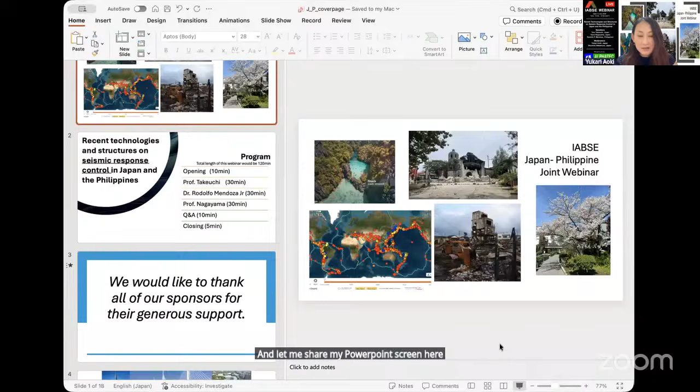Let me share my PowerPoint screen here. So this is the joint webinar, and today's program is about 120 minutes. Now we are in the opening session, and we have three speakers, Professor Takeuchi, Dr. Rodolfo, and Professor Nagayama. And we may have a question and answer closing time.

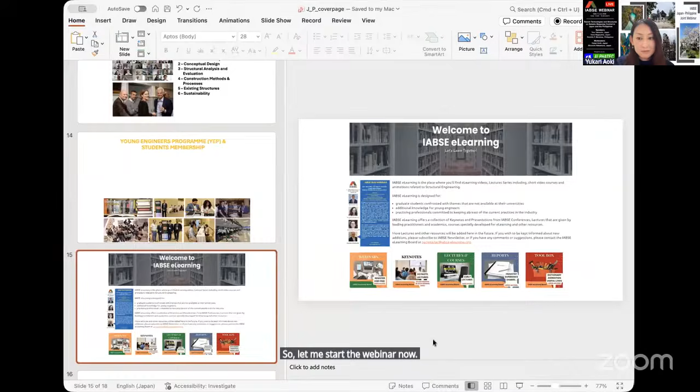So during the webinar, you have the Q&A corner. You can see some extra button at the bottom. You can click more or something, and you can see questions and answers here. And you can type any questions while the speakers are speaking. And we're going to have 10 or 15 minutes of question and answer time, and then speakers will try to answer all your questions. But if we don't have enough time, we will send you answers in the following days. All right. If you don't have any questions, we will start the webinar.

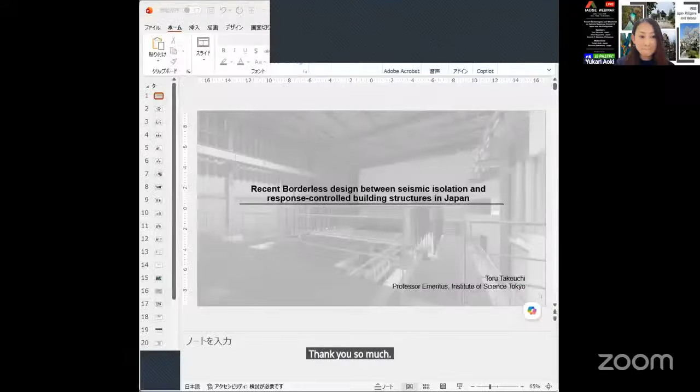Can you see my screen now?

Thank you very much for the introduction. I'm Toru Takeuchi from Japan. I'm a Professor Emeritus from Institute of Science Tokyo, previously at Tokyo Institute of Technology. I'd like to talk about the recent borderless design between seismic isolation and response-controlled building structures in Japan.

As you know, Japan is a very high disaster country. We have big earthquakes, typhoons, floods, and also volcanoes. Behind me is a picture of the Noto Peninsula earthquake in 2024. And we also have many earthquakes all over the world. Recently we had a big earthquake in South America, I think.

Because of this kind of disaster, seismic isolation and response controlled structures with energy dissipating devices or dampers have been widely applied to large numbers of buildings all over Japan in these 30 years. And they have been recognized as one of the ordinary structure options.

Professor Takeuchi, can you check the size of the slide? Too big? You can't see the full size? We can't see the whole slide. Okay. That's fine. Okay, thanks.

There are many systems now developed, and the boundary between these systems, between seismic isolation and response controlled buildings, is becoming ambiguous. Seismic isolation and response controlled structures share a common concept of

Okay, so probably this one should be erased, I think. Oops. How to? Okay.

Seismic isolation and response controlled structures share a common concept of, firstly, designing the main structure to support the self-weight elastically and be soft, which means increasing the natural period. And the second is reducing response by energy dissipation devices like dampers or fuses to absorb the seismic energy. So the systems recently realized in Japan are categorized in these figures.

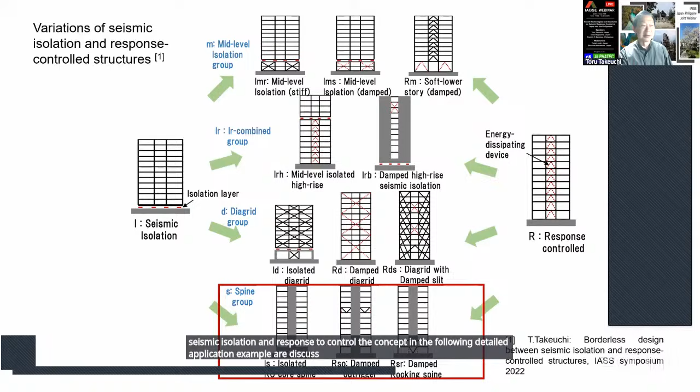Firstly, this is an example of a mid-level seismic isolation system. These are increasingly being applied, especially in the central Tokyo area, to avoid the loss of site use near the property boundary at the ground level and the risk of flooding. There are two types: those in which the lower floors are designed to be rigid, like the left side, Teco building, and those designed as soft with viscous dampers, as in Roppongi Tri-7 on the right.

In principle, a vibration control system with a soft first story is similar to seismic isolation, where the deformation is concentrated in the lower layers. This Nippon TV Bancho Studio introduces a soft lower story with viscous dampers on top of the diagonals, and obtains the seismic isolation effect without using seismic isolation bearings. Although such a system needs integrity at the deformation concentrated layers, seismic isolation pits are no longer necessary.

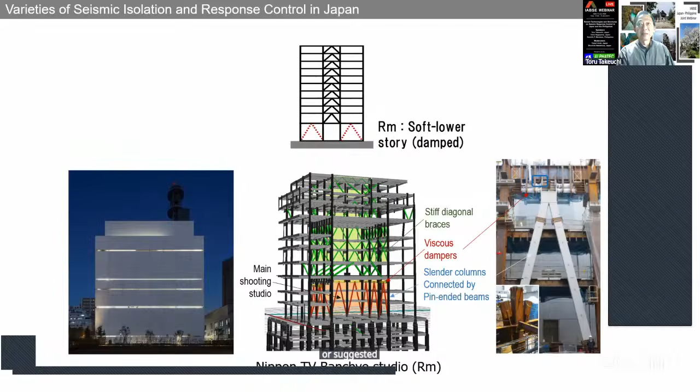However, in such seismic isolation using long columns, consideration must be given to avoid excessive damage concentration by the P-delta effect. So limiting it to only a very small first story height is not recommended. Distributing it over at least two or three stories is more suggested. And this figure shows an example of a structure that combines seismic isolation and response control together.

This is Roppongi Grand Tower on the left. Damping devices are also distributed in the lower structure. The isolated layer is here, and the upper part of the building is isolated, but the lower part has energy dissipation devices distributed. So it combines a response control structure and a seismic isolated structure.

On the right side is the Yoyogi Seminar Tower. It is combined with coupled wall structures, and the whole structure is supported by seismic isolation bearings with an actively controlled oil damper. It also produces shear deformation between the two coupled shear walls, and distributes viscoelastic damping devices to reduce the seismic and wind vibration effects.

And this is a combination of an outer braced frame structure around the perimeter, called a diagrid or grid skin, combined with a seismic isolation system. The outer grid skin structure has diagonals, which increase the horizontal stiffness of the superstructure. So that is a good match for the seismic isolation system.

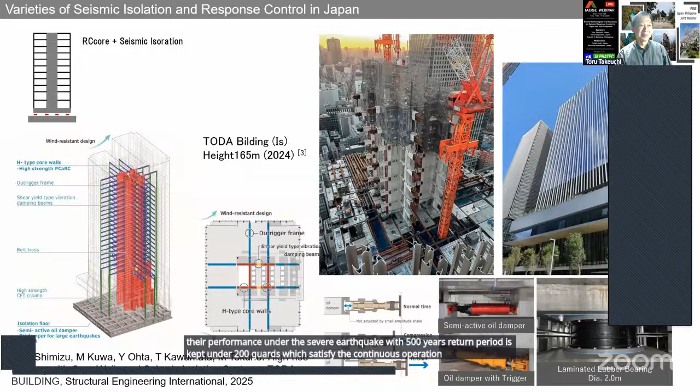acceleration. Because of the high stiffness of the core walls, the performance under a severe earthquake, with a 500 year return period, is kept under 200 gals, which satisfies continuous operation even under a severe earthquake.

Another structural system, the core spine frame with rocking and energy dissipation members, is also called a controlled rocking frame, damped spine system, or sometimes a strongback system, and has been applied to the seismic retrofit of old steel buildings in the US. In Japan, in the retrofit of a G3 building, the old frame is attached to a new spine wall with a pin support and damping devices on the shear plate, used to control the collapse mechanism and avoid damage concentration at the

typical floors. And this concept is also used for the new Materials Research Building at Science Tokyo's Yokohama campus. I introduced a rocking elastic steel spine truss frame, which rocks and dissipates energy at the vertical dampers, buckling restrained braces, and that can control the shear drift evenly and avoid damage concentration. So that is applied to new buildings.

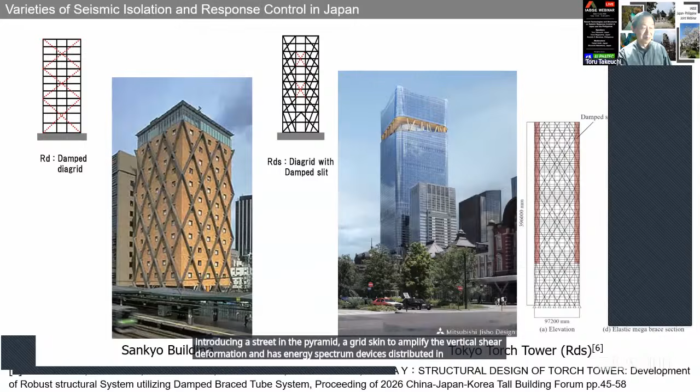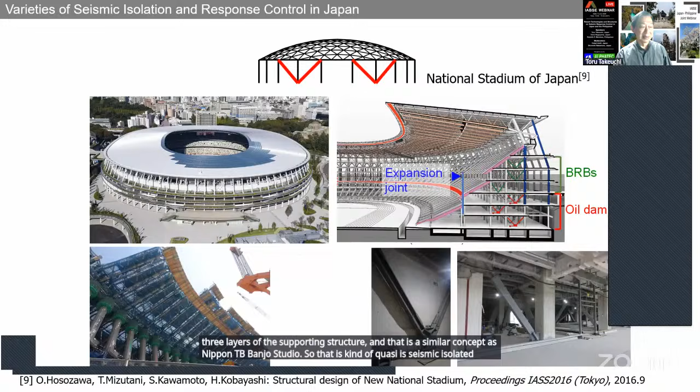Back to here is a detailed introduction to the Tokyo Torch Tower mentioned earlier. This building is currently under construction, but once completed, it will stand 385 meters tall, making it the tallest building in Japan, with an extremely large floor plan. This one line is 100 meters by 100 meters. It was determined that a damped outrigger was tried, but it was not functionally effective. Therefore, the plan is to adopt a braced tube structure to keep the natural period under 7 seconds, while also incorporating vertical slits into the tube to amplify the shear deformation, and inserting dampers into these slits to ensure high damping.

Okay, so this is a plan and the elevation of the buildings. The left figure shows the structure plan view, and it has a big plan of 100 meters by 100 meters. At the corner and the center of each part, in the 8 places of the plan, they have a slit. And in the slit, 4 layers or 3 layers of oil dampers were distributed.

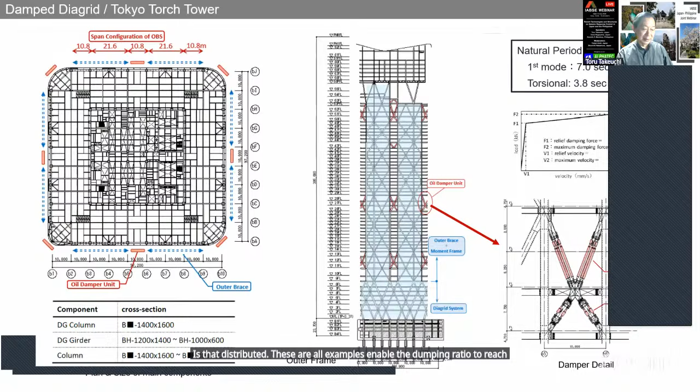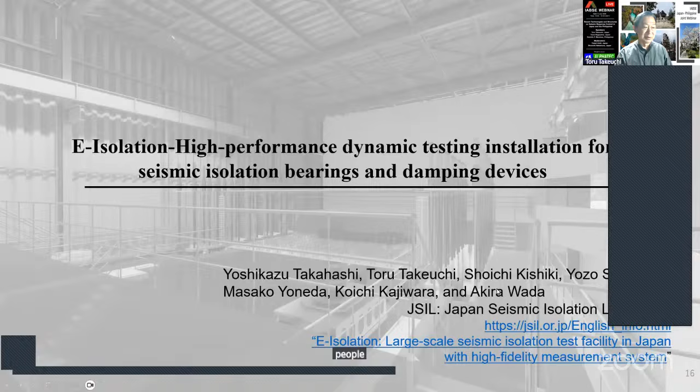Okay, so in the later part of my talk, I talk about the recently completed seismic isolation bearing testing facility called e-isolation. Many people worked together on this, not only these ones, so many people. So please check these web pages. As explained, the trend toward large-scale seismic isolation and vibration control structures is gaining popularity in the world. To address this trend, large-scale dynamic seismic isolation testing facilities were completed in the US, Taiwan, Italy, and China. And 2 years ago, we completed e-isolation in Japan.

So in these facilities, the test specimen is compressed by applying a high vertical load from the bottom, and received by the reaction beams through the moving platen. So here the specimen is compressed under a very high axial load, and this horizontal dynamic jack is moving the platen in the horizontal direction. And the reaction force of the specimen is measured by this load cell.

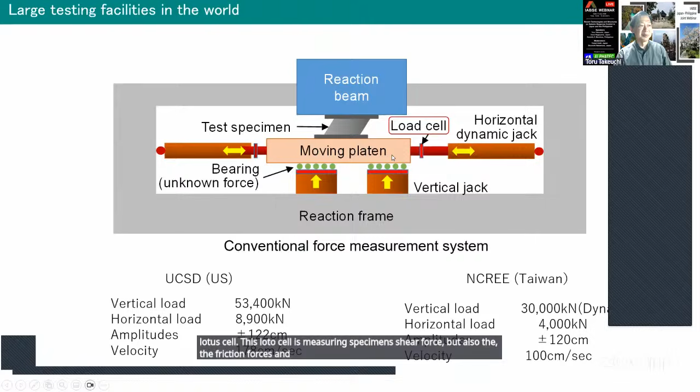But the problem is that even with a bearing with a very smooth surface, under the very high compressive load, some friction is still introduced. And also the moving platen is shaking dynamically, so its inertia force is also introduced into the load cell. This load cell is measuring the specimen's shear force, but the friction force and the inertial force can be contaminated into this load cell. So this is a common problem: this friction force and the inertial force in some testing reach 20% or so. So this is very difficult to remove in the models.

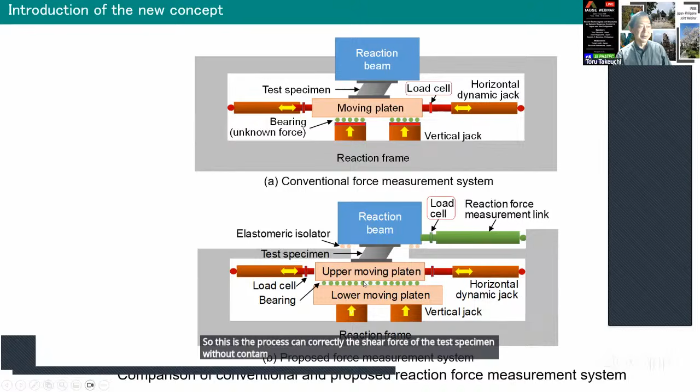So in the new seismic isolation test facility in Japan, we changed the concept. The reaction beam is not fixed, but supported by horizontally soft bearings, that is rubber bearings, and then connected rigidly to the reaction force measurement link, and the load cell was placed here. That means when the platen moves, the friction force is not transmitted to here, and also the inertial force is not affected here because the reaction beam doesn't move very much. So this load cell can correctly measure the shear force of the test specimen without contamination from friction forces or inertial forces.

So in this concept, the new e-isolation facility was completed in 2023 in Miki City in Hyogo Prefecture. That is Japan's largest experimental facility for seismic isolation and vibration control systems, capable of withstanding vertical loads of 30,000 kilonewtons, horizontal loads of 5,100 kilonewtons, and amplitude of 1.3 meters at 800 millimeters per second velocity.

The facility is placed near E-Defense. It's north of Kobe city, in Miki city. The reason for placing it here is that in the future we can use the hydraulic pump of the huge E-Defense facility, and it can also be expected to be used for reinforcing this e-isolation system. Okay.

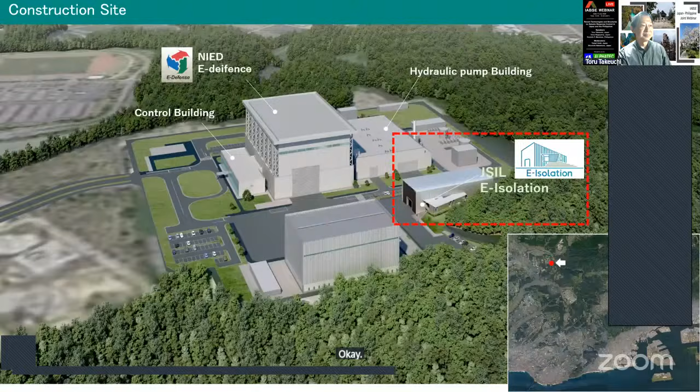deformation of the bearing forces, bearings. So we can completely have a clear, direct reaction force without contamination of friction or inertial forces. So that means by obtaining accurate reaction forces in real time, it is possible to perform a real-time hybrid simulation of any buildings using actual test specimens.

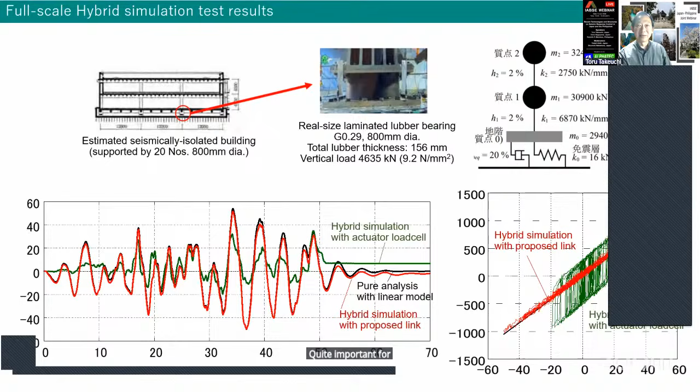The red one is the hybrid simulation with the proposed measurement link. They have very clear linear lines, and the response very precisely reproduces the pure analysis with a linear model. So this measurement system is quite important for real-time hybrid simulation.

So here is a scene of how it moves. The lower moving portion is vertically moved, supported by 24 vertical actuators, and the upper moving portion moves horizontally with 4 actuators, and the measurement link is supporting the reaction beams. Here is a specimen.

That is a 1.2 meter diameter natural rubber bearing compressed by 17,000 kilonewtons. Frequency is 0.1 hertz, and the amplitude is 500 millimeters. The same specimen can be looked at from the side. It's like this.

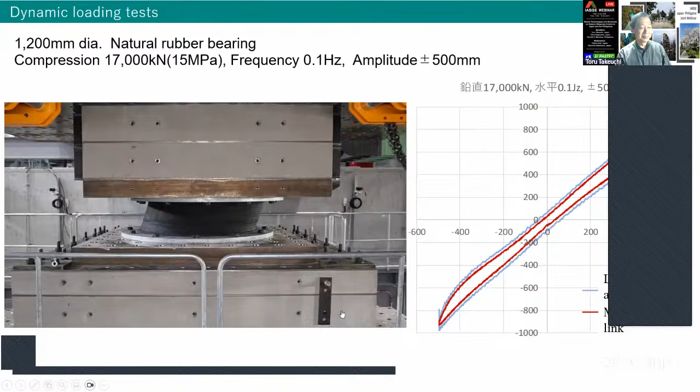Friction pendulum. The friction pendulum moves up with the horizontal movement. So in the testing, the lower portion should go down along with the horizontal displacement. But keeping the axial force and moving it down is a very advanced technique for the control.

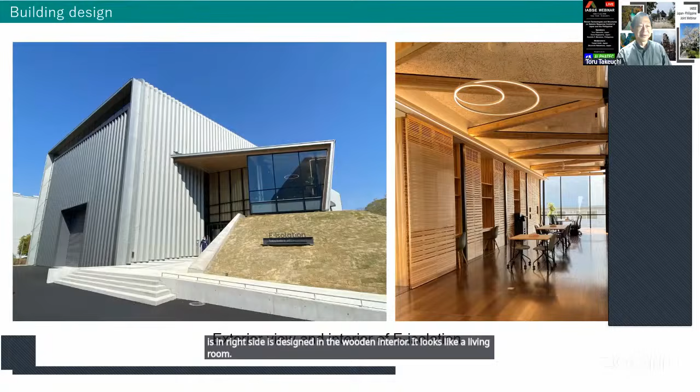So this facility looks very nicely designed and compact, and the operation room on the right side is designed with a wooden interior. It looks like a living room. So when you visit these facilities, you can stay very comfortably for the testing.

So if you have the time and the budget for testing in these facilities, please inform us for your seismic isolated or response controlled structures project. Please check on the specimens that can be tested in E-Isolation and join us in Miki City. Okay, that's my talk. Thank you very much for the kind attention.

For my presentation outline today, I would like to start with the history of bridge practice in the Philippines, followed by our evolution from force-based design approaches to the current performance-based approaches, and our goal to achieve resilience-based design through the use of seismic isolation systems.

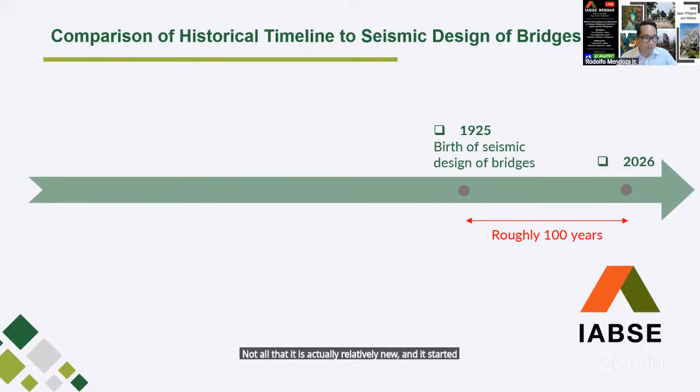The seismic design practice for bridges is not old, it is actually relatively new, and started around 1925 after the Kanto earthquake. So that is just roughly 100 years from where we are right now. That is a similar age to one of our prominent late senators in the Philippines, who achieved 100 years old before his unfortunate demise in 2025.

So we can say that the seismic design practice for bridges is roughly the same age as the birth of IABSE in 1929. And all of this is because of the event in Japan during the great 1923 Kanto earthquake. Many other great achievements in both sciences and engineering were already achieved centuries before the introduction of seismic design in both buildings and bridges.

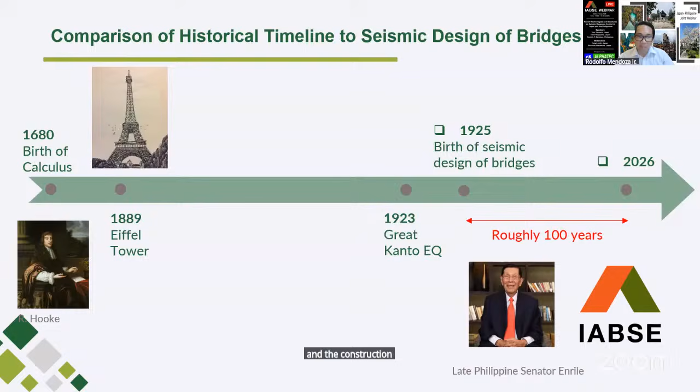The birth of calculus and the introduction of elasticity happened in the 17th century, and the construction of the Eiffel Tower happened around 1889. In the Philippines, one of the notable structures, the San Sebastian Basilica, was completed in 1891, almost the same time as the Eiffel Tower, years before the introduction of seismic design. There is a common myth that the San Sebastian Basilica was also designed by Gustave Eiffel because they were constructed at the same time.

But as an engineer who was involved in the restoration of the church, there is no actual evidence that it was actually Eiffel who designed the system. However, due to the commonality in terms of the steel technology, connection design, and the material used, which both came from Belgium, it is understandable to say that this San Sebastian Basilica was designed by Gustav Eiffel.

It was not until the 1908 Messina earthquake that the concept of considering ground motion in the design of buildings was considered, but not until 1915 that we had a formal definition on how to consider ground motions in the design of buildings, after Professor Sano of the University of Tokyo introduced the concept of seismic coefficient. And not until the 1923 Great Kanto earthquake was the concept introduced in building codes in 1924 and in bridges in 1925.

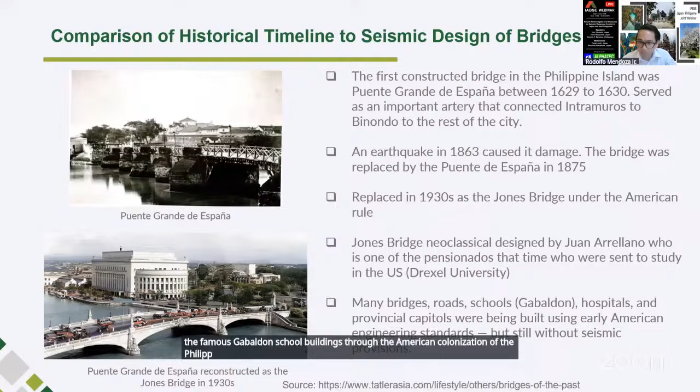But even up to this time, there was no account for seismic design or earthquake provision in the design of these buildings. 1961 was the year the Association of Structural Engineers of the Philippines was established, and from there on, the consideration for seismic forces has been included. In 1982, DPWH required the design of bridges to consider at least 10% of gravity. This was followed by the release of the ASEP NSCP, or the National Structural Code of the Philippines, Volume 2, which is dedicated to bridges, in 1987.

After the 1990 Luzon earthquake, DPWH released a department order which requires all bridges to conform to the latest AASHTO provisions, and later on these provisions were adopted by ASEP under its Volume 2 in 1997. From there on, the DPWH, together with the support of JICA, produced new standards, and the latest is the 2015 release of the DPWH DGCS, which updates all the guidelines for bridges, including standards for seismic provisions following the LRFD bridge seismic provisions, and also the introduction of seismic isolation guidelines.

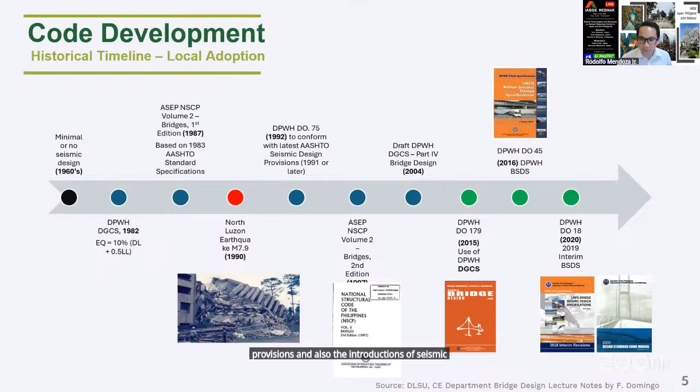If you look at it, the development of code in the Philippines transitioned from the original force-based design concept into capacity and displacement-based design approaches. And now we are looking at how we can further improve our bridge design practice from this capacity-based design and performance-based design to full resilience-based design approaches.

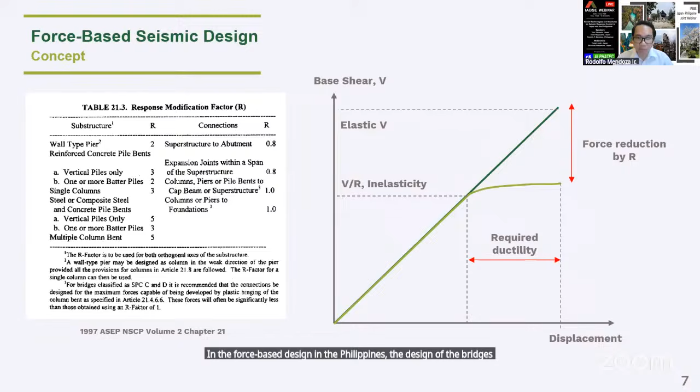In the force-based design in the Philippines, the design of the bridges identified the substructure as the main earthquake-resisting system, and a single ductility factor is used to represent the ductility of the entire system. This is the same concept that has been applied in the US for buildings and was also adopted for bridges in the Philippines. Clearly, there are some limitations with this approach, and this resulted in some of the damages during the 1990 Luzon earthquake, which include damage to foundations, soil liquefaction, the unseating of superstructure, pier collapse, and deformation due to lack of ductility and insufficient seat width.

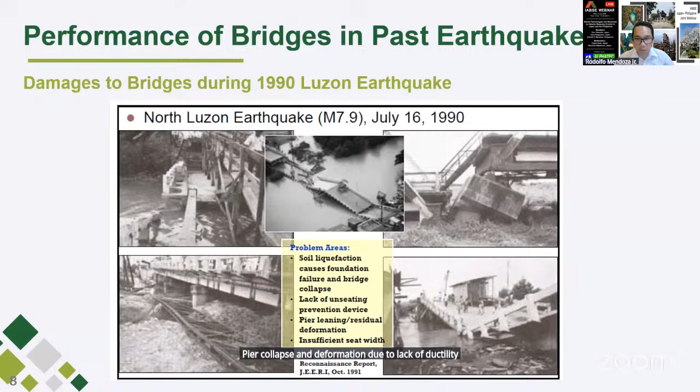However, through the introduction of the new standards, following the learnings from the earthquakes, we have now adopted a combination of code following both the US standards and the Japanese standards. The new DPWH standard for bridges has adopted both the AASHTO provisions and the provisions of the Japan Road Association in the design of bridges. Specifically, this provision still adopts the definition of the R value as a one-system ductility factor for representing the substructure selected for a system, but this time we are introducing two levels of assessment for our hazard levels. We have also adopted seismic performance requirements, which are mostly patterned after the Japan Road Association guidelines. And we have also introduced seismic verification, although mostly on force-based design approaches.

The guideline has also introduced and defined specific earthquake-resisting systems. And now, for the first time in the code development for bridges in the Philippines, we have introduced the use of seismic isolation as one of the earthquake-resisting systems to control the response of bridges in both the longitudinal and transverse directions.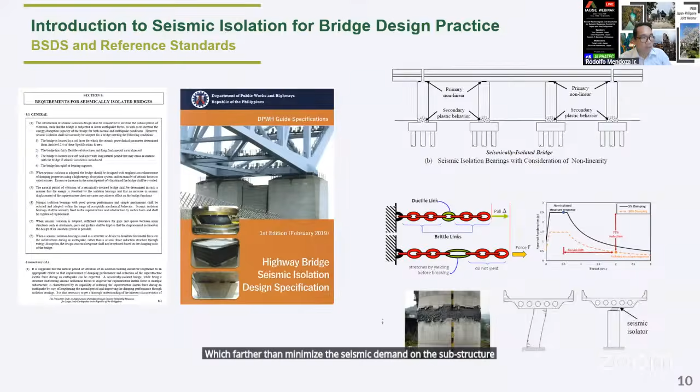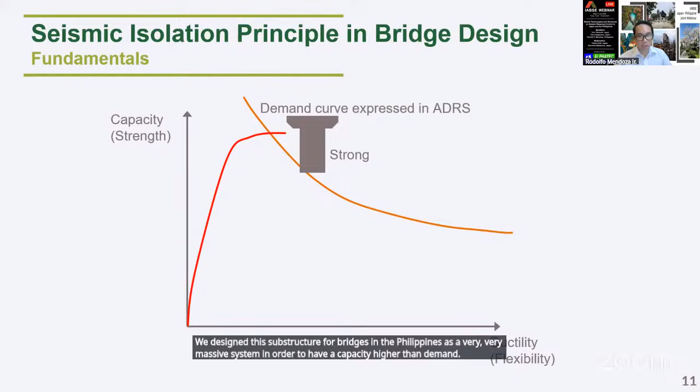So if we look at the original approaches in the Philippines and compare them with the current approach, using the ADRS, or acceleration displacement curve, given a demand, conventionally we designed the substructure for bridges in the Philippines as a very, very massive system in order to have a capacity higher than demand. Through the introduction of capacity-based approaches, we introduced the concept of ductility and capacity-based design, where we can now design flexible and highly ductile structures.

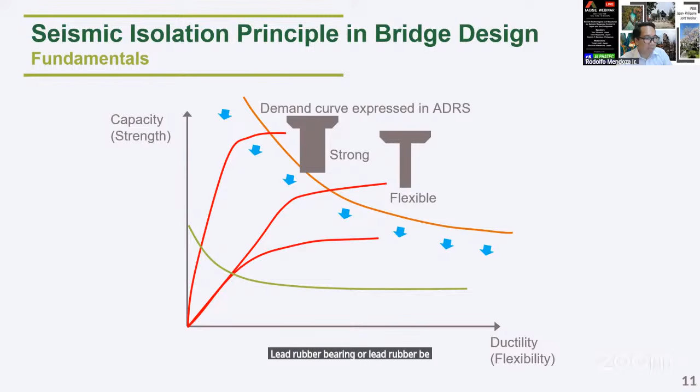But with the introduction of the seismic isolation system, we can reduce the demand on bridges by incorporating lead rubber bearings as well as dampers in the structure, which reduces the demand by increasing the damping and increasing the period of the structure, which then ensures that there will be no damage on the substructures even after a major earthquake.

Of course, there are some limitations in the use of seismic isolation in the Philippines, which are listed in the DPWH BSDS guideline. For example, we are not allowed to use it on soft subsoil conditions unless proven otherwise, if the bridge has a very long period, or if there is tension in the support reactions. Currently, our DPWH guidelines only support lead rubber bearing with plug and high damping laminated bearing. The use of friction pendulum system is not covered by our guidelines.

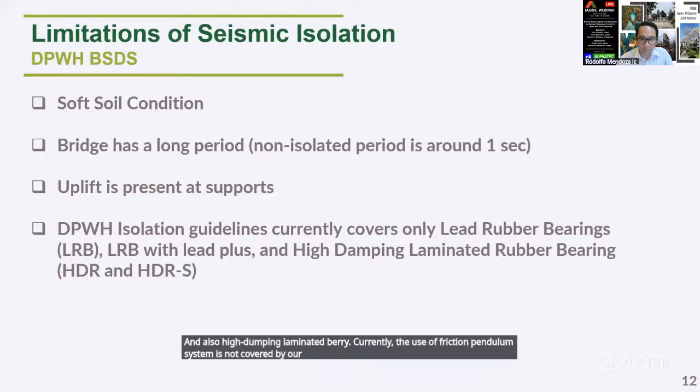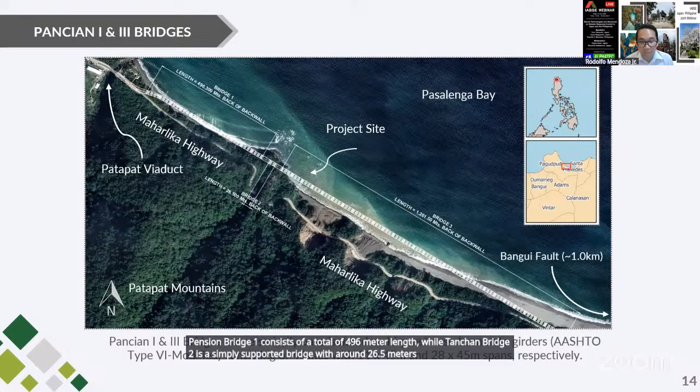To show you some applications of the isolation system in the Philippines, one of the projects we were involved with is the construction of the proposed Pancian Viaduct. This Pancian Viaduct consists of 3 bridges we call Pancian Bridge 1, Pancian Bridge 2, and Pancian Bridge 3. The Pancian Viaduct is a project that connects the existing Patapat Viaduct along the Manila North Road in Ilocos Norte. Pancian Bridge 1 has a total length of 496 meters, while Pancian Bridge 2 is a simply supported bridge around 26.5 meters in length, and Pancian Bridge 3 has a total length of around 1.2 kilometers.

For these bridges, a site-specific seismic hazard assessment was conducted for the entire project to produce 2 levels of design earthquake. The PGA and spectral parameters, as shown in this slide, are provided for level 1 earthquake and level 2 earthquake. Level 1 is a 100-year earthquake, and level 2 is a 1,000-year earthquake. Now, due to the proximity of this bridge to an existing fault, we were able to produce two types of level 2 earthquake: one that is normal to the fault, and one that is parallel to the fault.

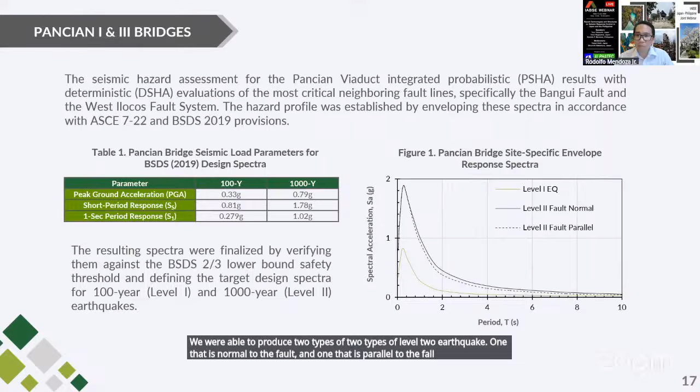Using the generated spectra, we have extracted ground motion data from PEER NGA-West2, and utilizing this, we match those spectra from the site-specific record in order to generate ground motion records for nonlinear response history analysis.

Now, in the Philippines, under BSDS, you can carry out at least 3 ground motion records and take the maximum response from these 3 records as the basis of performance, or get the average of 7 ground motion records in each direction and use the mean value to actually evaluate the performance of the structure.

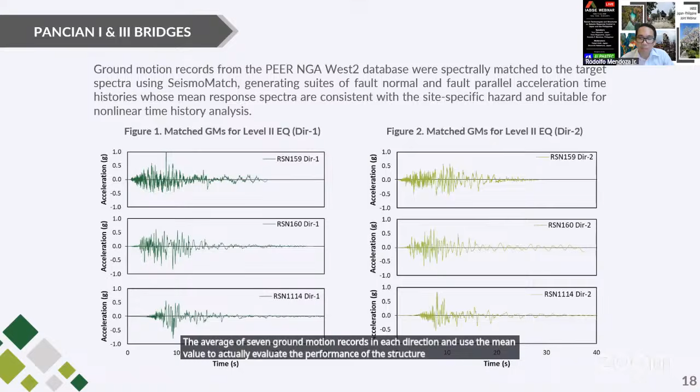In the design of seismic isolation, we normally follow this approach when we design the isolator system. And in most cases, we already work with the supplier of the seismic isolation before we even start the project. So basically, from the bridge design and bridge information, we develop the geometry, initial sizing of the elements, as well as the initial configuration of the bridge superstructure, as well as substructure and foundation.

From this, we develop the mathematical model to represent a 3D configuration of the structure, and we extract the vertical reactions from the support conditions. Using these vertical reactions, we provide this information to the supplier of isolators, which then size and provide the parameters, including mechanical properties of isolators, which we will then use as input to our mathematical model. So this is an iterative approach, and we commonly exchange data until we achieve the target performance for the bridge.

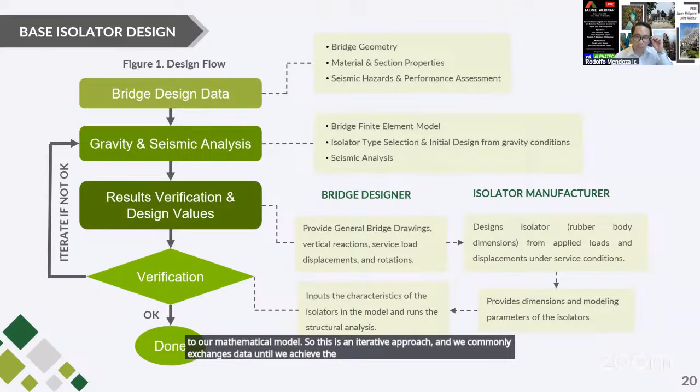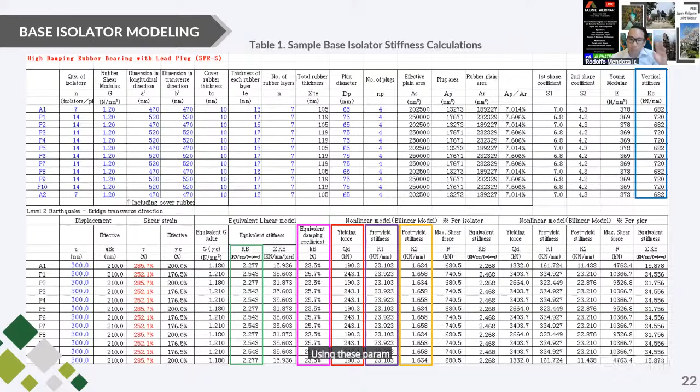Now, these parameters were used to model the bilinear response of the isolators, and the models represent some of the key mechanical properties of the isolation system, including the stiffness, the strength, and the energy dissipation. This process of modeling was iterative, and we refine until the target bridge performance is actually achieved. Using these parameters from the supplier, we then input them to our chosen software and mathematical model in order to confirm if the performance of the system matched the target performance.

For this viaduct, the bridges were classified as critical bridges, which require them to remain elastic under level 1 earthquake and with limited damage under level 2 earthquake. The seismic performance is the same as that of the Japanese standard, which measures performance in terms of 3 criteria: the seismic safety design, the seismic serviceability design, as well as the seismic repairability design.

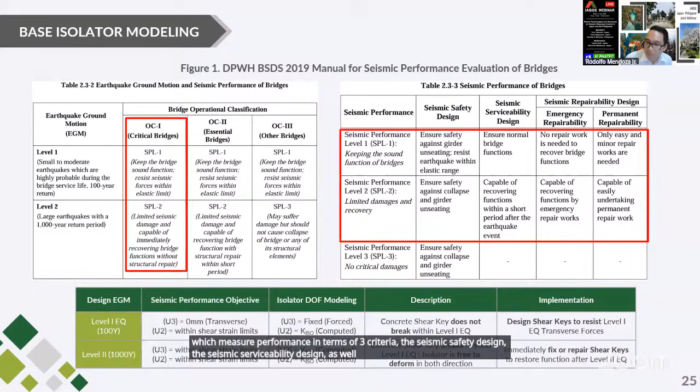This slide shows you the articulation on the behavior of isolators under level 1 and level 2 earthquake. The concept is at level 1 earthquake, the isolator is expected to remain elastic, and it will move in the longitudinal direction, but it is fixed in the transverse direction. The fixity of the system in the transverse direction is provided by what we call shear keys to prevent the system from moving in the said direction.

At level 2 earthquake, however, the isolators are now allowed to move in both directions, longitudinal and transverse. Showing you here the articulation under level 1 and level 2 earthquake, including the specific seismic performance objective and how we have implemented this system, including the modeling of shear keys. Of course, wind demand was ensured to be less than the yield capacity of the isolation system.

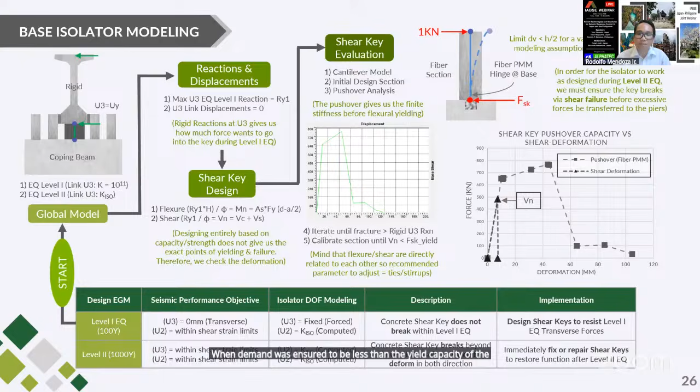This slide here shows the performance of the 2 model bridges. We modeled both a non-isolated Panshan bridge model and a similar bridge but with an isolated system. The slide shows the results of the modal analysis comparing the non-isolated versus the isolated case. It is evident from this comparison that there is a period shift, which is approximately 2 times the period of the non-isolated bridge system.

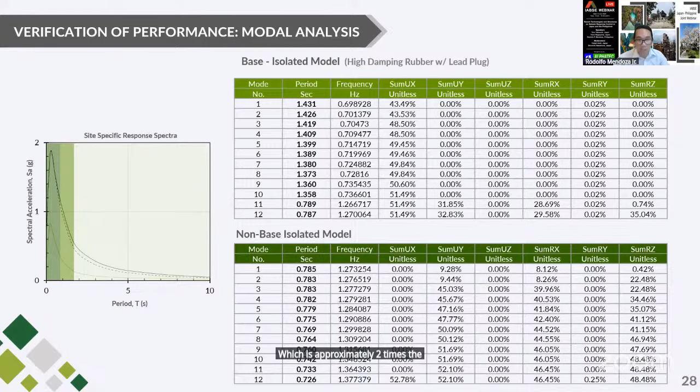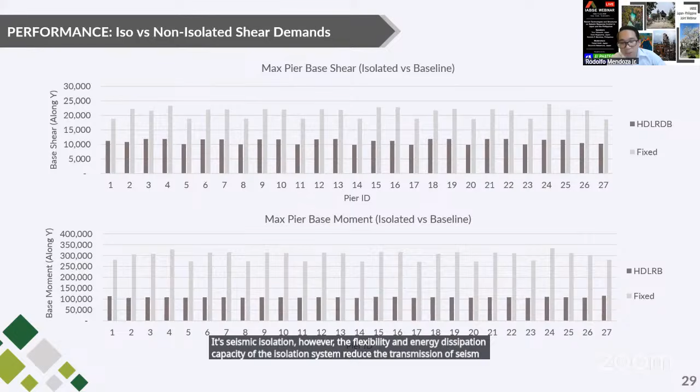This slide shows the comparison of the seismic shear demands between the non-isolated and the isolated bridge models, which clearly demonstrates the effectiveness of seismic isolation. For the non-isolated bridge, the seismic forces are transferred more directly into the substructure, resulting in higher shear demands at the piers as well as in the foundation. With seismic isolation, however, the flexibility and energy dissipation capacity of the isolation system reduce the transmission of seismic forces to the bridge substructure, and as a result, the isolated bridge shows significantly lower shear demands compared to the non-isolated bridge.

This slide shows the critical pier that was selected in order to compare the displacement time history response of a non-isolated bridge model and the isolated bridge model. For the non-isolated bridge, the pier directly participates in resisting the seismic demand, and as a result, larger displacement response was observed, indicating significant deformation demand in the substructure.

In contrast, if you look at this graph, the isolated bridge shows a substantial reduction in the pier displacement. This is because the isolation system lengthens the period of the bridge and concentrates much of the seismic movement on the isolation level only, rather than transferring it directly to the piers. This reduced displacement demand at the critical pier demonstrates the effectiveness of isolation in protecting the substructure.

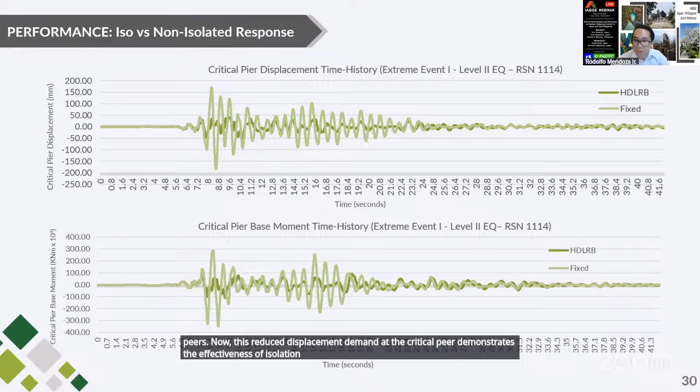So this comparison clearly highlights the effectiveness of seismic isolation in reducing the demand on the substructure by shifting the main seismic deformation to the isolation system, allowing the bridge to remain elastic even during strong earthquakes such as level 2 ground motion in this study. Thus, it contributes to the resilience of this structure during earthquakes.

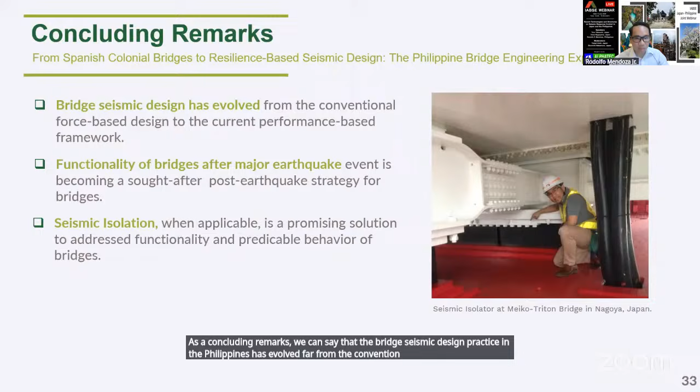As concluding remarks, we can say that bridge seismic design practice in the Philippines has evolved far from the conventional Spanish colonial era stone masonry bridges and force-based design approaches to the current performance-based framework that we have been adopting locally in the Philippines. Nowadays, the functionality of the bridge after a major earthquake is becoming a sought-after post-earthquake strategy for most of our bridges. And seismic isolation systems, when applicable, are considered a promising solution to address the functionality and predictable behavior of bridges. Thank you for listening.

Thank you very much, Dr. Rodolfo. That was a very great presentation. And finally, we have Professor Tomonori Nagayama Sensei. So it's all yours now. Thank you. Let me share my screen. Okay, do you see my slide?

Yes. Okay, good evening to participants from Asia, the Philippines, Japan, and Asian countries, and good morning, good afternoon to other participants. I'm Tomonori Nagayama from the University of Tokyo and also Vice President of IABSE. It's my great pleasure to give this presentation at this IABSE webinar. My presentation title is as written here, Monitoring Informed Seismic Response Assessment and Control of Bridges in Japan.

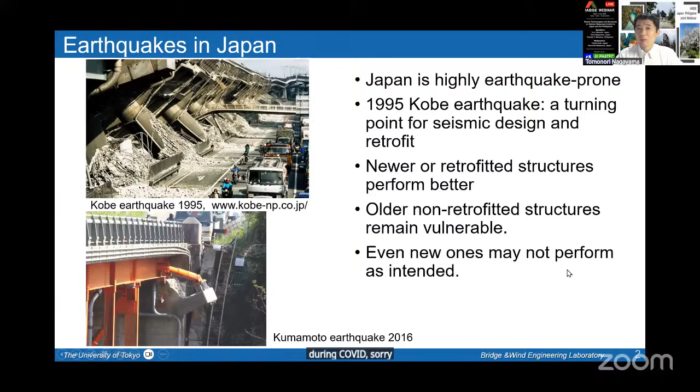First, I would like to briefly review the main categories of bridge seismic technologies in Japan. The first is seismic resistant design. In this approach, the structure resists earthquake force mainly by strength and ductility, and damage may be allowed in designated components under severe earthquakes, but collapse should be prevented. A typical example is the steel jacketing of RC bridge piers, and this improves strength and ductility of existing reinforced concrete piers.

The second is seismic isolation. Flexible bearings lengthen the structural period and reduce the transmission of earthquake force. Additional damping can also reduce the displacement and energy demand. And the third is seismic control. Dampers or control devices reduce seismic response by dissipating energy or applying control forces. And in Japanese bridges, these concepts are often combined with lateral force distribution systems and other fail-safe measures on the next slide.

The first one is unseating prevention. This prevents the girder from losing support and falling during a major earthquake. This is directly related to collapse prevention. The second is vertical step prevention. Even if bearings are damaged, large roadway level differences should be avoided, especially for emergency transportation routes. So this measure is related to post-earthquake trafficability. The third is the lateral displacement restrainer. This restrains transverse movement of the superstructure and improves transverse stability. These systems are not always very visible, but they are very important for bridge resilience after major earthquakes.

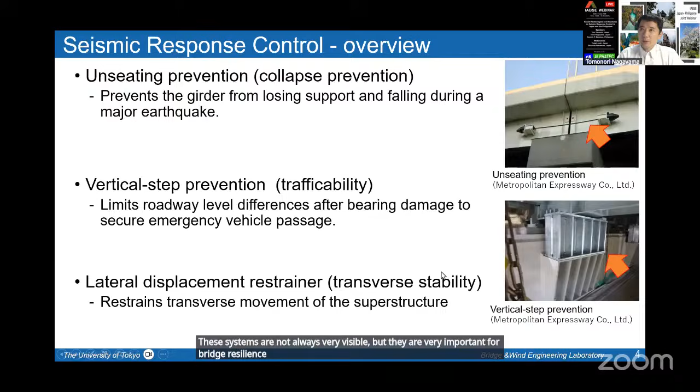Here is one example of seismic resistant design for retrofit of BPA, bearing plate type A, bearings on the Metropolitan Expressway. BPA bearings suffered damage during past earthquakes, and they were originally designed for level 1 earthquake, small to moderate earthquake, and partial bearing fall-off was observed. Replacing all of these bearings is costly and time-consuming, so an efficient and effective retrofit method was developed by Tokyo Metropolitan Expressway. The retrofit uses reinforcement blocks, steel rods, existing bearings, and high-strength bolts. The basic idea is to improve the bearing capacity without replacing the existing bearings.

This slide shows the effect of the retrofit. After retrofit, the bearing capacity becomes much higher, the target level is increased from the level 1 small to medium earthquake demand to much higher level 2 demand. And another important advantage is short installation time. The method does not require jacking up the girder and removing the existing bearing or adjusting the reaction force. The installation procedure is very simple. Remove the existing side blocks, install retrofitting members, and tighten the steel rods. So this is a good example of practical seismic retrofit for existing urban expressway bridges.

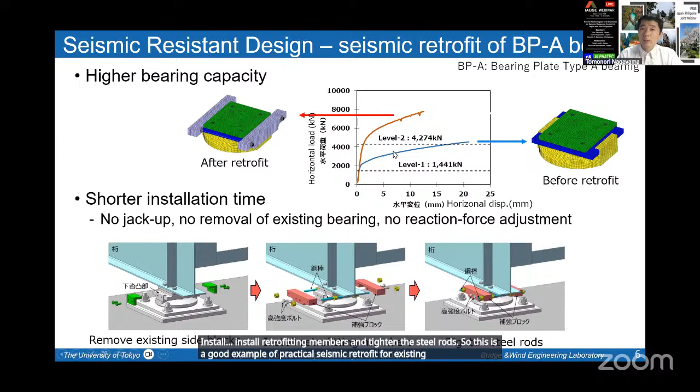And next, I will show an example of seismic control using a transverse displacement friction damper. In metropolitan areas, damage to the pier base should be avoided. This is because space around the pier base is often very limited, and damage assessment and repair are difficult for underground or congested components. So the concept here is to use bearings or devices that remain fixed under small to medium earthquake, level 1, but allow movement under large earthquakes. So under level 1 earthquake, the device works as a restraining device. Under level 2 earthquake, large earthquake, it allows displacement and works as a damper.

This slide explains the mechanism more clearly. Under level 1 earthquake, on the left, the small to moderate earthquake, the device prevents lateral movement of the girder. This helps protect the expansion joint and maintain normal serviceability. Under level 2 earthquakes, large earthquakes, on the right-hand side, the device works as a fuse and damper mechanism. It releases the movement of the superstructure, caps the inertial force demand, and provides seismic damping. As a result, damage at the pier base can be significantly reduced.

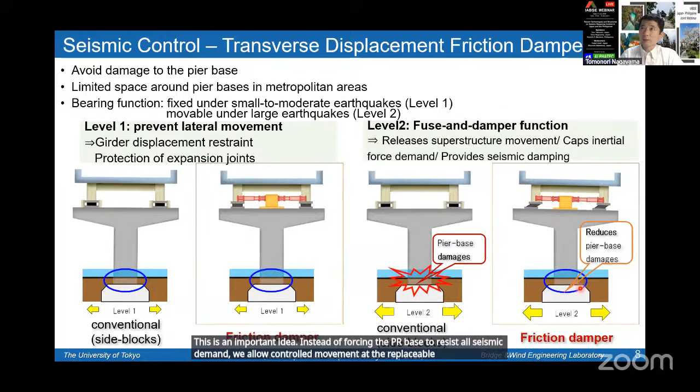This is an important idea. Instead of forcing the pier base to resist all seismic demand, we allow controlled movement at the replaceable or accessible devices. This slide shows an application of the friction damper to an actual urban viaduct. Because of severe spacing constraints, the structural configuration is quite complex, and retrofitting the pier base is difficult. However, damage to the pier base should be avoided. So the transverse friction damper is an effective solution for this case because it controls seismic response at an accessible location and reduces the demand on the pier base. You can see the installed damper in this photo.

Now, I would like to introduce the concept of functionally separated bridge systems. Conventional isolation bearings often concentrate many functions in one component. For example, they support vertical load, resist horizontal load, dissipate energy, accommodate displacement, and provide restoring forces. So this is efficient if a single bearing has all functionalities, but it also creates a problem. If the bearing is damaged, many functions may be lost at the same time.

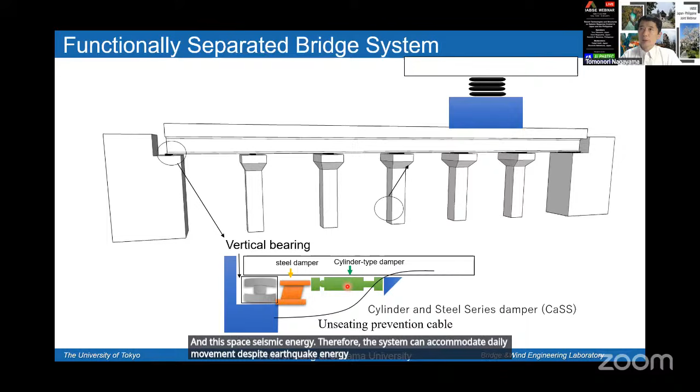One example is the cylinder and steel series damper, or CaSS. It consists of a steel damper and a cylinder type damper connected in series. The cylinder damper accommodates slow movement, such as thermal deformation. This helps avoid unnecessary fatigue damage to the steel damper. During a strong earthquake, level 2 earthquake, the velocity-dependent cylinder damper becomes relatively stiff, and the steel damper yields and dissipates seismic energy. Therefore, the system can accommodate daily movement, dissipate earthquake energy, and concentrate damage in a replaceable component.

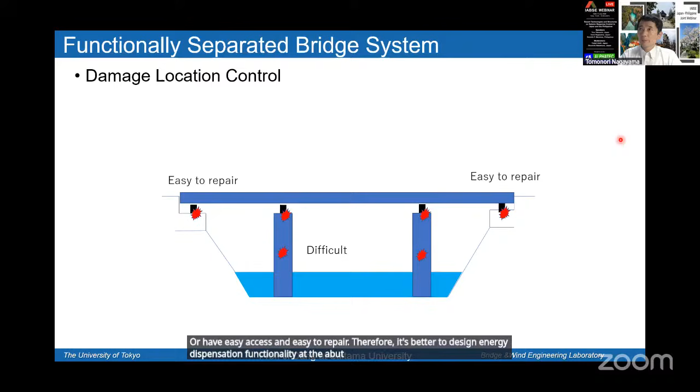When we look at the bridge as a whole, piers in the river are difficult to repair, while the bearings at the abutment have easy access and are easy to repair. Therefore, it's better to design energy dissipation functionality at the abutment bearings. So the cylinder and steel series damper is thus installed at the abutment. In short, the message is: separate functions, control damage, and recover quickly.

This example clearly shows the importance of monitoring. Without measured seismic response data, such a hidden malfunction would have been very difficult to identify. Monitoring helps close the gap between design assumption and actual structural behavior.

This slide shows seismic response monitoring after the 2024 Noto Peninsula earthquake. We installed wireless sensors on a bridge and recorded aftershocks for about 2 weeks. During this period, about 60 earthquakes were observed. The bottom figure shows an example of recorded acceleration. Although the sensors were battery-operated IoT nodes, the data quality was high. P-wave and S-wave arrivals can be clearly identified, and the sensor nodes were well synchronized. So this kind of monitoring allows us to observe bridge response under real earthquake excitation. In other words, an earthquake can be regarded as a full-scale experiment on the bridge.

From the monitored seismic responses, we can estimate not only global response, but also structural properties of components. Here, relative displacement responses of rubber bearings were obtained from acceleration measurements. Using these responses, the stiffness of the rubber bearings was estimated. The estimated stiffness differed from factory test results by only about 10%. This is important because rubber bearings may degrade relatively quickly compared with many other bearing components. Monitoring allows us to evaluate the structural properties under actual service conditions.

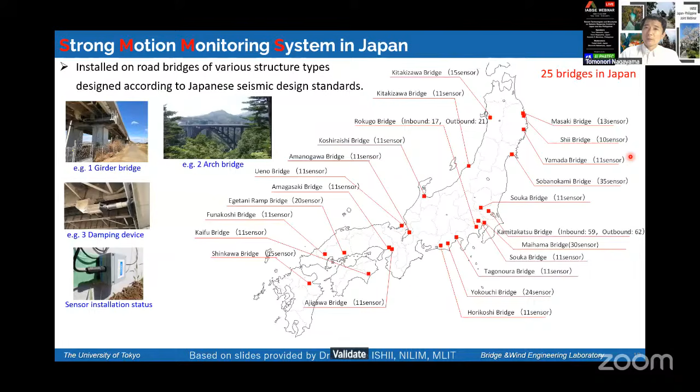Bridge monitoring under real earthquakes is becoming increasingly important. In Japan, the National Institute for Land and Infrastructure Management under the Ministry of Land, Infrastructure, Transport, and Tourism has installed a strong motion monitoring system on 25 road bridges of various structural types. This slide may be a bit dated, so now we may have more bridges instrumented with this system. Anyway, the data help validate seismic design assumptions. Now, I will show an example from Yokohama Bay Bridge.

Yokohama Bay Bridge is a long-span cable-stayed bridge and is an important transportation link. Understanding its seismic behavior is therefore very important. During the 2011 Tohoku earthquake, transverse pounding was observed between the wind tongue and wind shoe, which are important seismic response control devices for long-span bridges.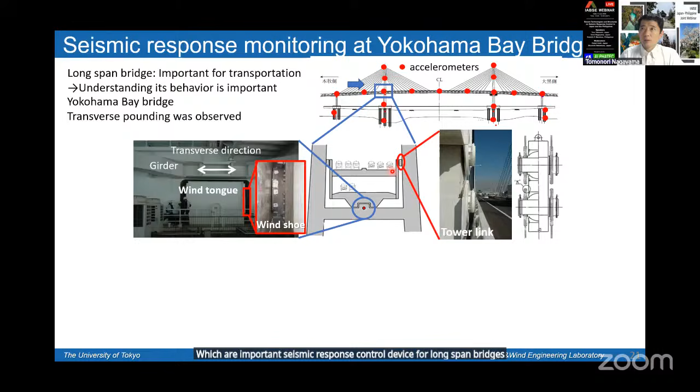This wind shoe and wind tongue restrain the motion at the tower link. The lateral displacement and lateral direction acceleration recorded show periodic impulsive responses. So these spikes indicate pounding. This phenomenon was not recognized before the earthquake and was not considered in the design.

The observed pounding may have serious consequences. If the wind tongue or wind shoe is damaged, the damage can propagate to other components such as tower link, cables, and girders. Actually, minor damage was observed at the tower link in the 2011 earthquake. In the design, the wind tongue and wind shoe were assumed to move together without pounding. However, the monitoring data showed that pounding occurred in a transverse direction, which is different from the design assumption, and this phenomenon is further studied.

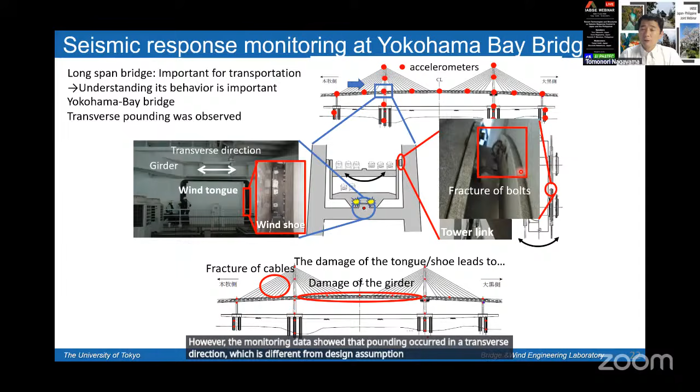This is the lateral direction acceleration record during the earthquake. We estimated natural frequency during this 600-second earthquake response. Then we observed that the frequency increased at the beginning and then decreased. If the bridge is linear, the natural frequency should remain constant. If we consider nonlinearity, usually frequency should decrease at the beginning during large motion and then increase. But here the frequency actually increased. This is very much different from the design assumption and our understanding.

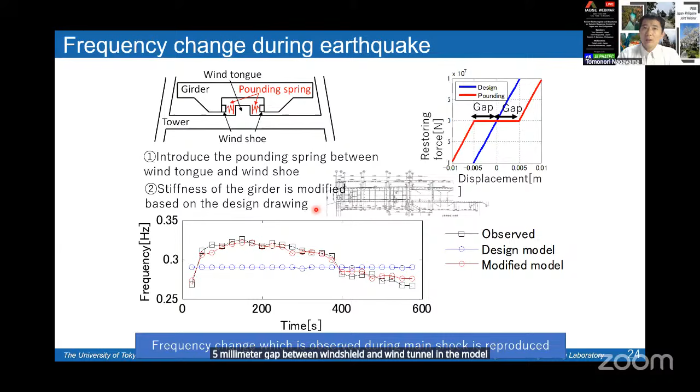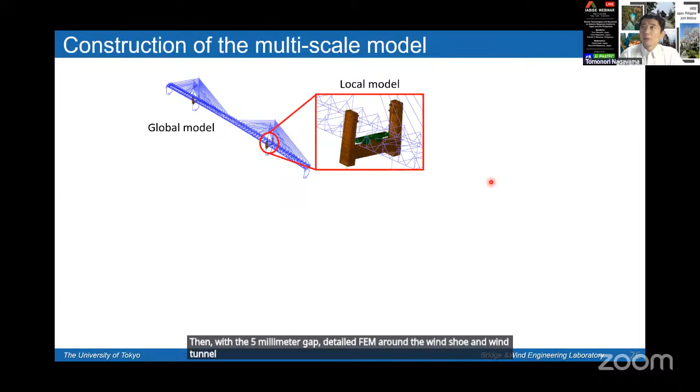We then included a small gap, a 5 millimeter gap, between wind shoe and wind tongue in the model. Then we were able to reproduce the frequency change. With this model, the acceleration time history and frequency spectrum are very well reproduced. Yes, the time history shows good agreement. Then with the 5 millimeter gap, a detailed FEM around the wind shoe and wind tongue was prepared with shell elements, and a multi-scale model was constructed. This model allows us to evaluate local deformation and possible damage modes under seismic excitation.

Using this model, consistent with the observation, a level 2 design earthquake was applied. The analysis showed that the base part of the wind tongue yielded, and the gap increased due to pounding. This indicates that the repeated pounding can cause local plastic deformation and damage. The key point is that the monitoring data helped us identify the real mechanism, and the validated model helped us evaluate possible damage under extreme events.

This slide shows a more critical consequence. After damage of the wind tongue, the tower link may experience large displacement. In the analysis, the pin of the tower link can come out from the link brackets, which means the drop-off of the tower link can occur. The important message is that the detailed FEM, consistent with seismic event observation and monitoring data, clarifies the seismic performance under extreme events.

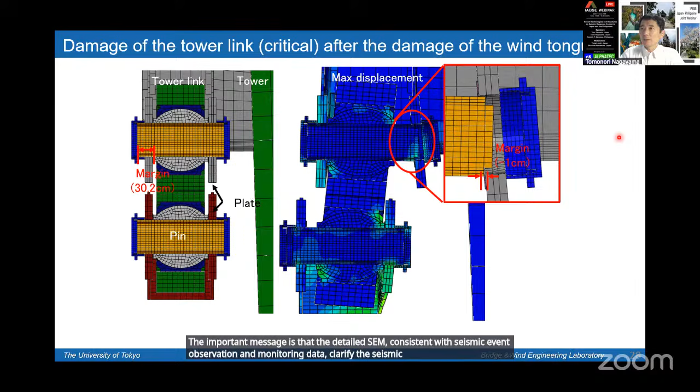So far, we have discussed monitoring for understanding real behavior and validating models. The next step is post-earthquake rapid assessment. Rapid assessment is essential after earthquakes. For moderate earthquakes, it helps reduce downtime and economic loss. For severe earthquakes, it supports emergency response. For structural damage, displacement is a key indicator. For example, story drift in buildings or relative displacement in bridge components is closely related to damage.

However, displacement estimation from acceleration is difficult, especially in the nonlinear range. Double integration may work in the linear range with appropriate filtering, but nonlinear and residual displacement estimation remains challenging. To address this problem, we have studied deep learning-based displacement estimation. Here we use a dilated CNN. The advantage of dilated convolution is that it can have a wide temporal receptive field. It can efficiently capture long-range temporal information without using an excessively deep network.

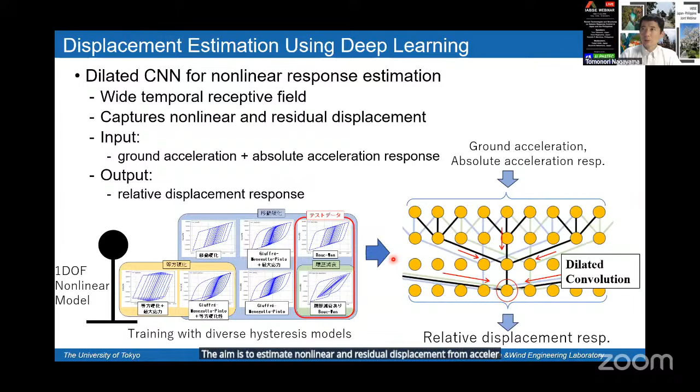The input is ground acceleration and absolute acceleration responses, and the output is relative displacement response. The model is trained using diverse nonlinear single degree of freedom systems with different hysteresis models. The aim is to estimate nonlinear and residual displacement from acceleration records. The trained model was validated using a nonlinear Abaqus FEM model. Two structures with different damping ratio, natural period, and hysteretic behavior were considered. The result shows that the nonlinear displacement response can be estimated from acceleration responses, even for FEM models that were different from the training single degree of freedom models. So this suggests the potential of data-driven displacement estimation for rapid post-earthquake assessment.

We are now extending displacement estimation from a single pier to a bridge system. A detailed forward simulation model with soil part was used to generate response data, while a reduced order model without soil part was used for Kalman filter-based displacement estimation. Despite model simplification, displacement was estimated accurately, with 1 to 10% error laterally and less than 2.5% longitudinally. This shows the potential of acceleration-based displacement estimation for bridge-level post-earthquake assessment.

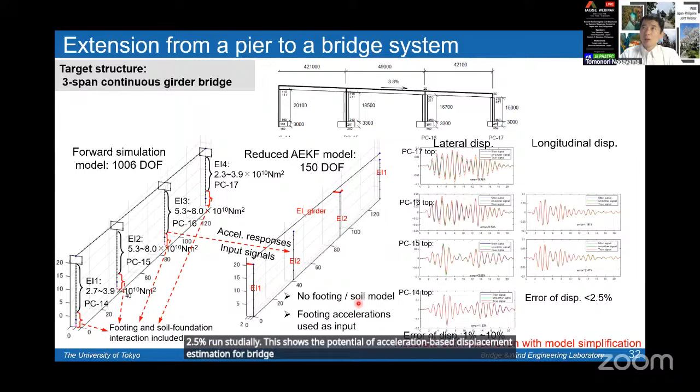To conclude, I'd like to emphasize three messages. Japan has developed diverse seismic technologies for bridges, from resistance and seismic resistance, isolation control, fail-safe, and trafficability measures. Monitoring-informed assessment is essential because real bridge behavior may differ from design assumptions. Monitoring helps identify hidden mechanisms and validate seismic performance. Finally, acceleration-based parameter and displacement estimation can support rapid post-earthquake assessment. The next step is application to more complex bridge and nonlinear damage scenarios.

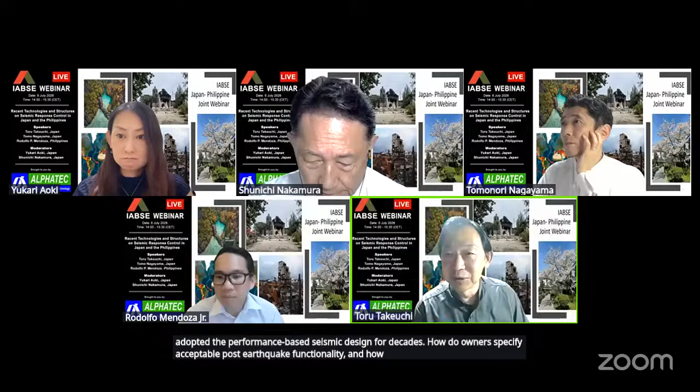And the final third question: Japan has adopted performance-based seismic design for decades, so how do owners specify acceptable post-earthquake functionality, and how does that influence the choice of isolation or damping systems? So that's also a nice question. Recently, of course, the seismic isolation or response control might be a little bit more expensive than ordinary seismic design options. But recent earthquake experience has led more property owners to become conscious about business continuity after earthquakes and the probable maximum loss, the PML. So there is more understanding among owners of the worth of seismic isolation or response control.

Also, this month, the Japan Structural Consultant Association, JASCA, launched a third-party seismic rating certification service, with ratings from platinum to gold, silver, and bronze. It's 4 grades above the required design code, similar to a rating system on the west coast of the US. So probably with more services, performance-based design can gain popularity among building owners, I hope. Yeah, that's my answer.